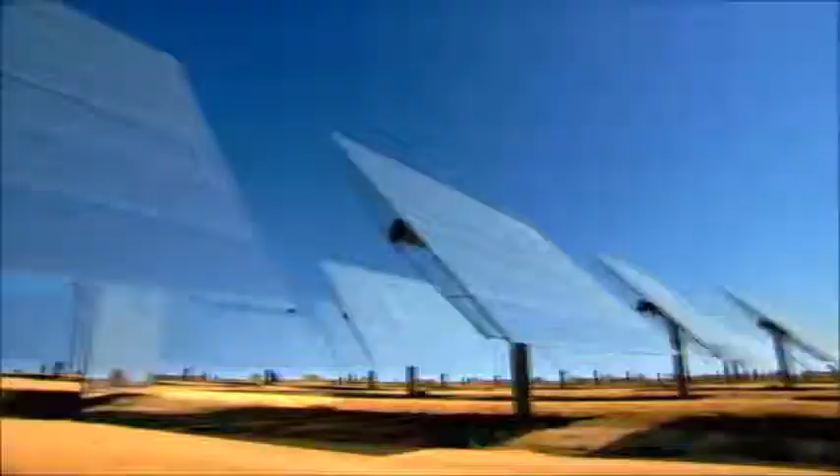When I was in college, I tried to think about, well, what are the areas that would most affect the future of humanity? So the three things were the internet, making life multiplanetary, and the third being sustainable energy. So that's what really ties together my companies, is that sort of thought from 20 years ago. Tesla Motors is Elon's sustainable energy brainchild. Named after electric power pioneer Nikola Tesla, it's a car company that only makes totally electric vehicles. No hybrid and no alternative fuels. Absolutely no tailpipe. The company estimates their electric cars cause 50% less CO2, even if much of the electricity comes from a coal-powered plant.

It's technology Elon and co-founder J.B. Straubel believe we need. We're solving problems for our children, our grandchildren. Oil is a finite resource, and eventually we have to find alternatives. When you take that oil out of the ground and you burn it, it's extremely dangerous. We should not play Russian roulette with the atmosphere. We only got one. Tesla's founders have a vision of a world without gasoline cars. They are convinced electric is not only cleaner, but better. Now, they want to prove it to the world.

They believe their cars can trigger a transport revolution and bring electric motoring to the masses. What we're doing here at Tesla can have an amazing impact and revolutionize the auto industry and make every car on the road electric. That's our end goal. The Model S is to lead their revolution. It's to be an electric car unlike any other. A family sedan that can go from 0 to 60 in under 6 seconds, and further on a single charge than any other electric production car.

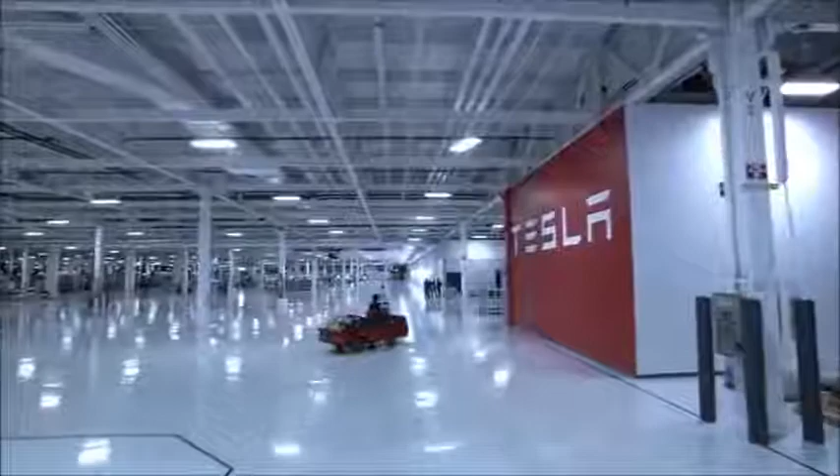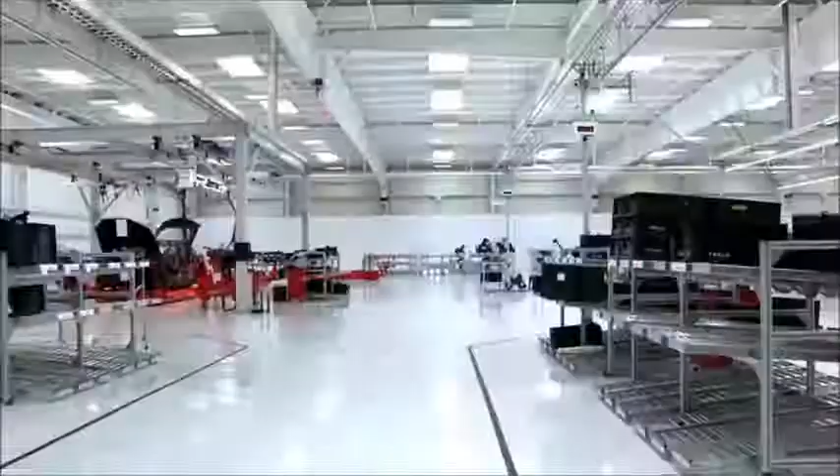It's a totally fresh approach to car manufacture. The walls and floors are painted white. The machinery a striking red. Skylights and windows flood the factory with sunlight. If you make the factory pristine and clean, that sets the tone for the vehicle. We want that same sense of quality and precision in the car itself.

As part of the whole company ethos, bikes are provided so the workers can get around the factory. I think it's important to have an environment where people look forward to coming to work. So it's worth putting some effort into making the factory beautiful.

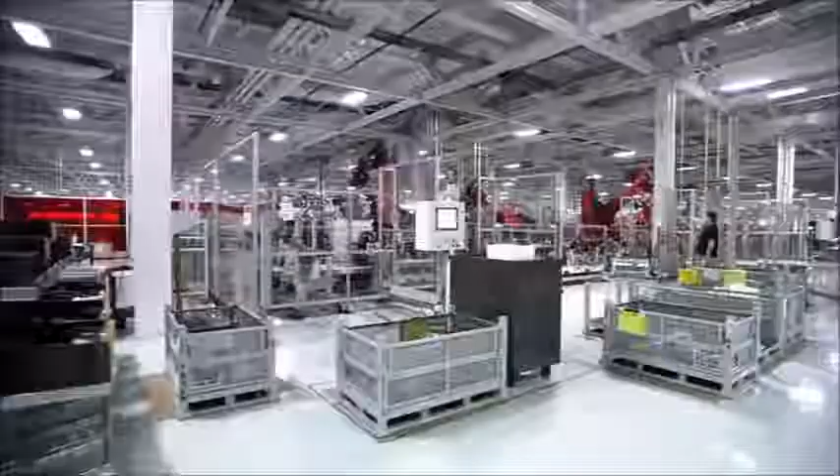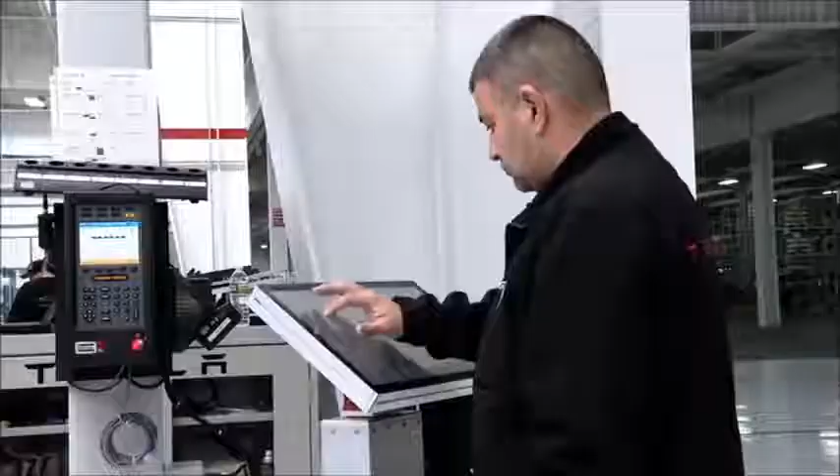In true Silicon Valley style, they fill the space with the most advanced technology, creating an automated production line capable of building tens of thousands of cars. Super efficient multitasking robots, self-guided smart carts, and computerized production schedulers.

The factory is designed to be up there with the very best in the world. We love engineering. We love beautiful machines. We love new technology. We love to innovate with high technology. And also in manufacturing, we love to do that.

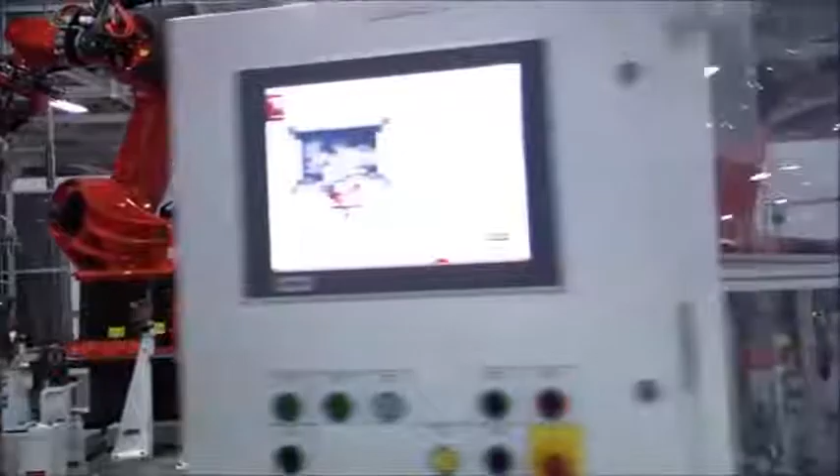Without training, these sophisticated robots are useless. They all need to be taught before they can run tasks automatically. Every robot is programmed by hand. The Tesla team has meticulously trained 130 sophisticated robots over a year and a half.

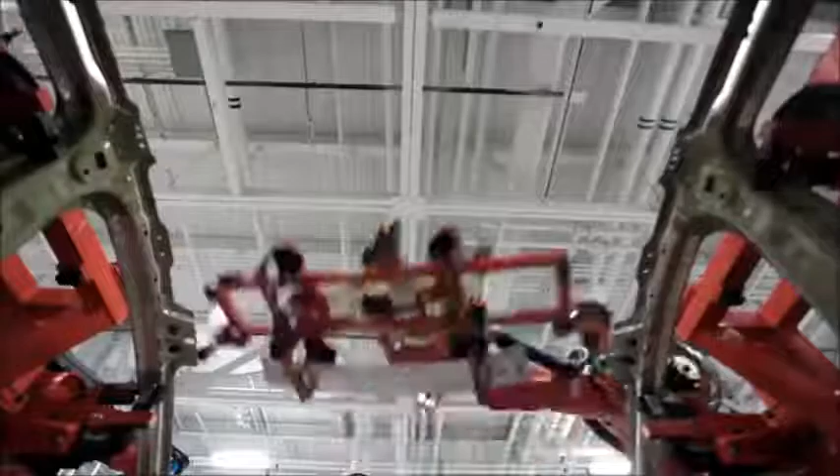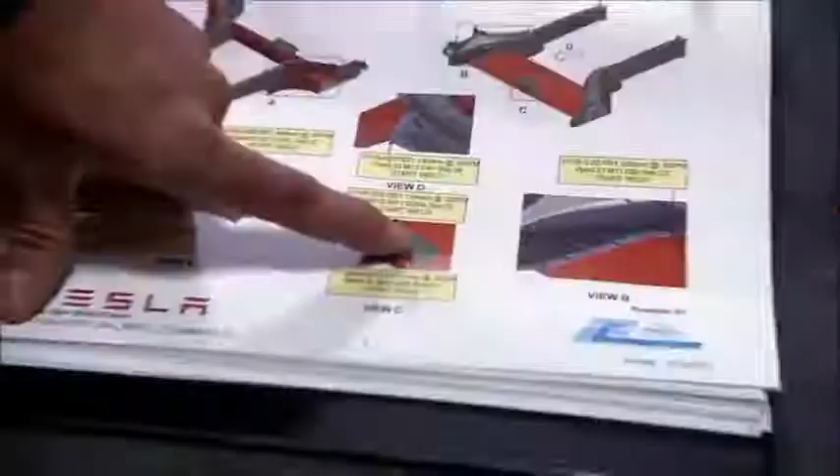One of the last robots still to be programmed is a multi-point welding robot. It will be used to join the car's underbody. These are pretty busy robots, so we got to make sure that our takt time is good. A robot's work is only as good as the man who trains it. Brad Johnson is a welder with over 25 years' experience at the highest level.

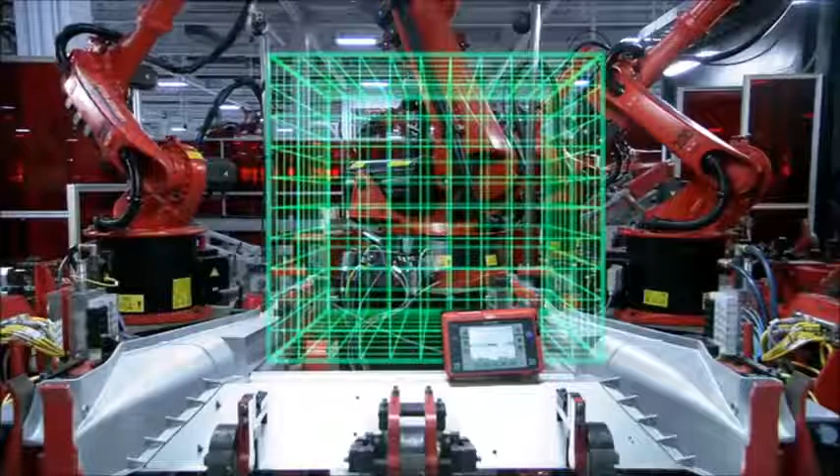Getting this done today, we'll have the teachings all nice and smooth, and then we can start running 100% and full automatic. That sounds good. The space in which the robot operates is treated as a three-dimensional grid. The head can be manually guided to any point using a teach pendant. There's our start point and our weld position.

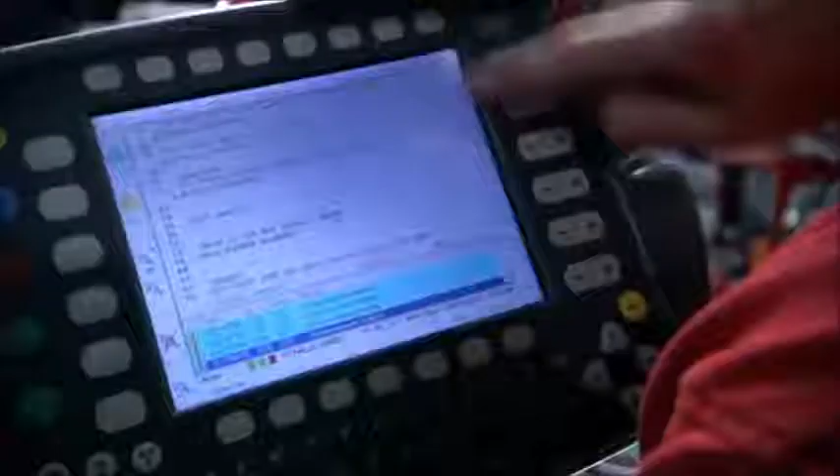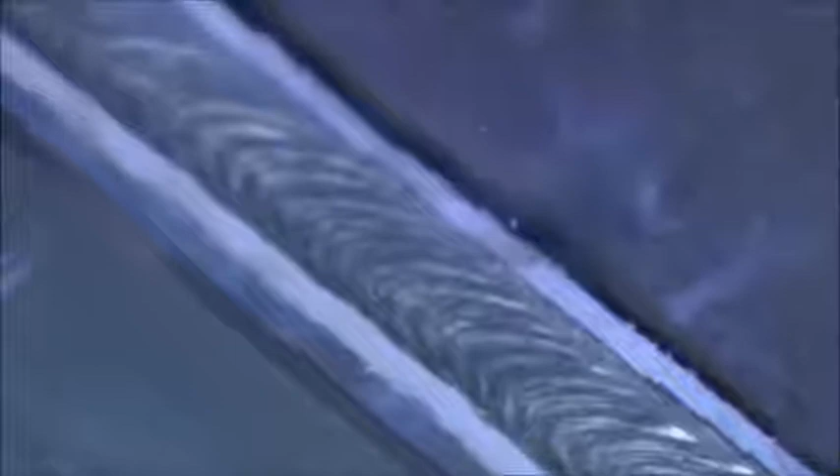Brad guides the robot millimeter by millimeter and uploads the coordinates. The robot works out the most efficient route and runs the program. Looks like the teaching is right on mark, and we have a really good quality weld right here. So we should be able to run full auto with this weld. When full production begins, Brad's handiwork will be exactly replicated by the robot 100 times a day.

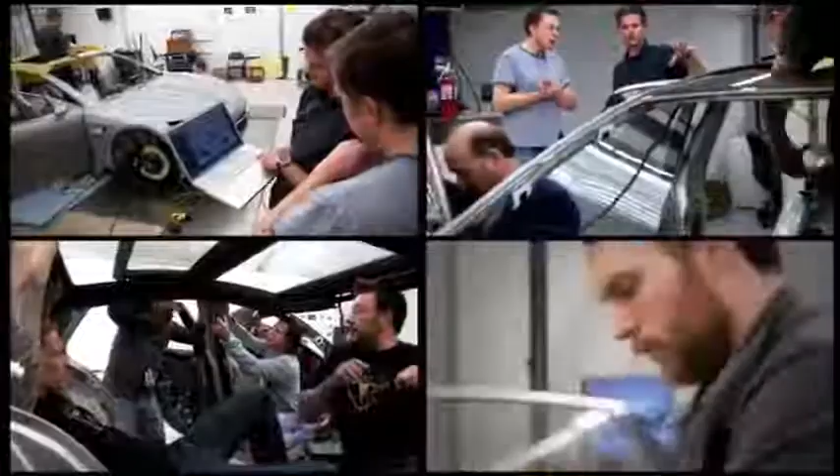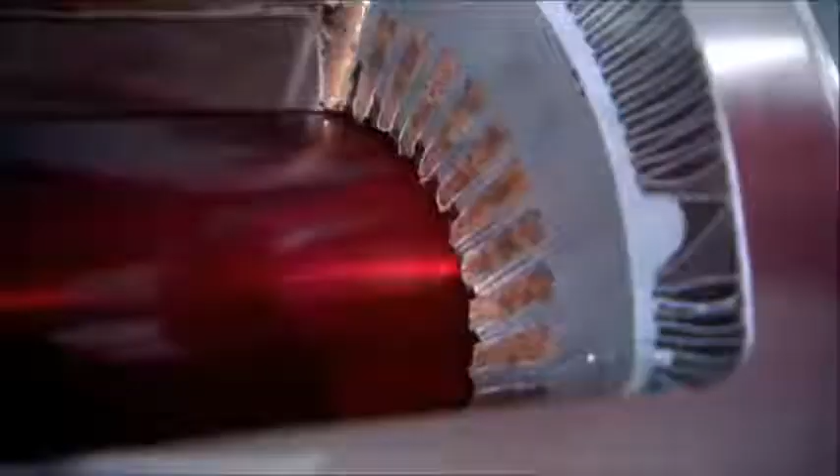Since their inception in 2003, Tesla Motors have been pursuing their electric car revolution with a step-by-step strategy. In an unconventional business move, Elon decreed that Tesla must invest in their reputation first and worry about profit later. Stage 1. Make a small number of high-value cars that prove electric power can be desirable. The Tesla master plan is very simple. We start off creating an expensive, low-volume car to help break the mold in electric vehicles.

Plan in place, they set to work on their first car, basing it around the British-built Lotus Elise. 5 years later, they released the Tesla Roadster. Quicker off the blocks than an Aston Martin Vantage, the electric sports car astonishes the motoring world. Step 1 complete in the Tesla strategy. What we showed was that an electric car could be sexy, it could be fast, and it could be long range. And that if you produce such a car, that people would buy it. But as a $100,000 two-seat sports car, it's a luxury second vehicle to most of its owners.

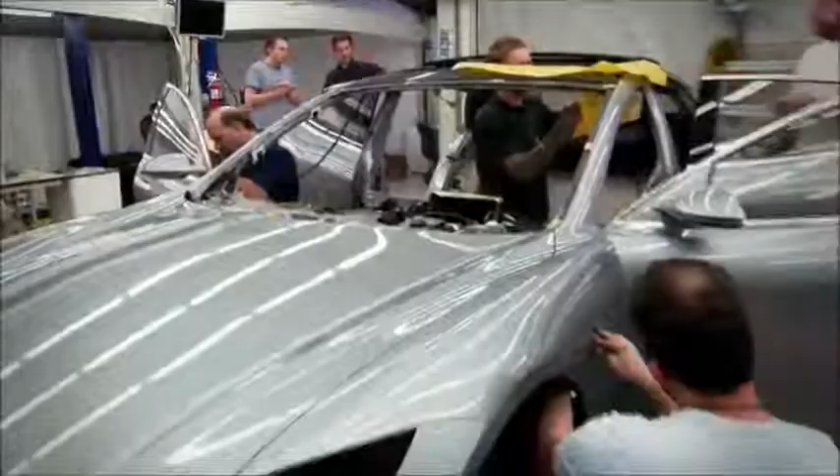Time for the pivotal Stage 2 in the master plan. A car that costs half as much and sells in much bigger numbers. A very important step in the Tesla strategy is really going to show that a mainstream electric car can be better than a gasoline car. The Model S is the second step in Elon Musk's vision of an electric revolution. A premium mass-market sedan designed and built from the ground up by Tesla.

At the studio in Los Angeles, they are working to craft that car. The Model S is really the foundation of Tesla. It's the first true product designed, engineered, built, manufactured by Tesla. And it's really the beginning of what our mission is about.

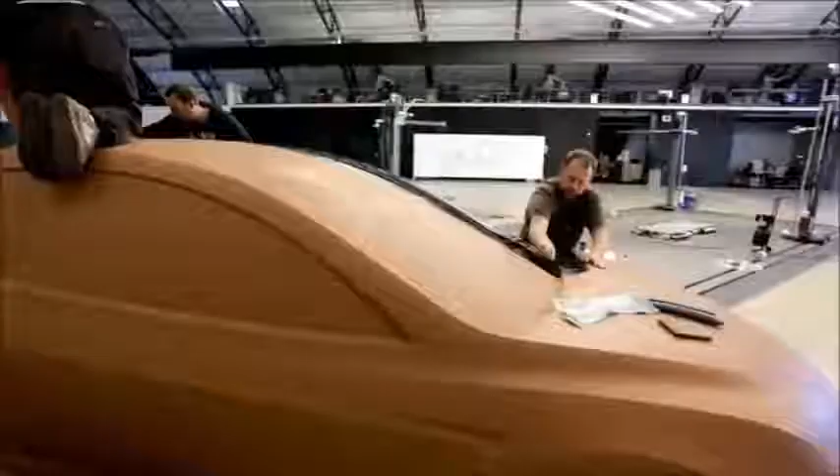Franz von Holzhausen is the chief designer. He believes Tesla's design needs to have some conventional appeal. It's really easy to have a clean slate and go pretty crazy with that. We had to start with something that people could relate to. If they even knew or cared that it was an electric vehicle, they were attracted to it.

We've stretched the sedan and made it a little bit more modern, but it's still a sedan. It still has this somewhat traditional cue, and so it's easy to love because of that association. Although uniform in appearance, the Model S is a unique car. It was conceived as electric. Even the shape is designed to maximize the battery's range.

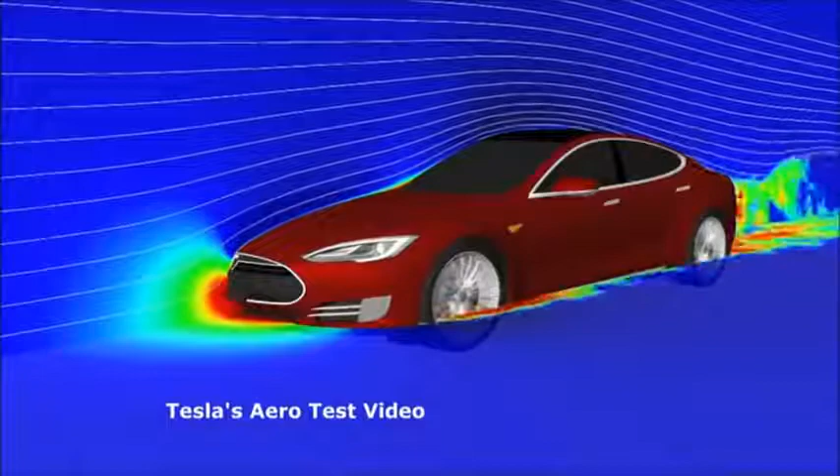And the body and the waist here is all slim, so there's no excess fat or body mass on this car. And that's another one of those elements that just translates into great efficiency. This car is one of the most aerodynamic sedans on the market. In an electric car, conserving the battery power is so important, the designers put huge efforts into reducing the drag. Even the door handles are aerodynamic, receding flush into the body.

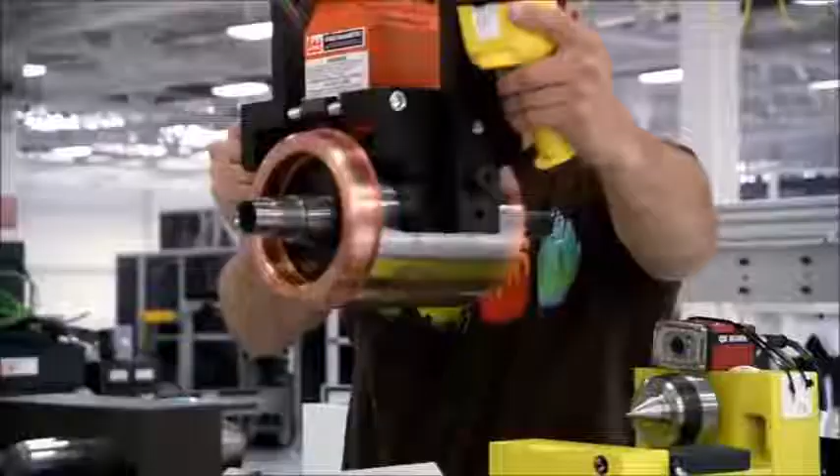But it's the interior that is most heavily influenced by the electric powertrain. The powertrain is incredibly small. You get the same performance out of a motor that's the size of a watermelon that fits between the rear wheels, and everything else above that is what I call the opportunity space.

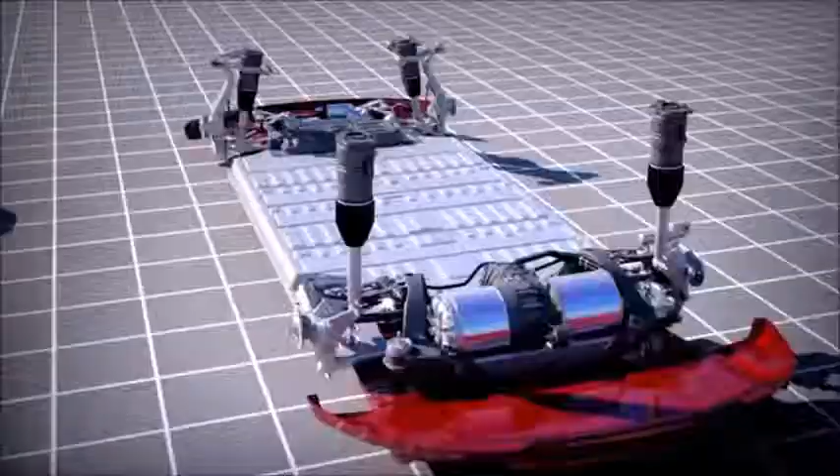The design team started with the motor and flat battery pack and worked upwards. With the motor next to the wheels, there's no need for a drive shaft, so there is no rise under the rear middle seat. There is no fuel tank or transmission. The Model S has free space from the floor upwards.

What you'll see is a vast amount of space. In fact, it's actually so big that we decided that we could actually fit 7 people, and we do that by putting 2 rear-facing child seats in the back here. And you can see where they fit here, and their legs go right down in there.

So this is what we call the frunk, and it's really the trunk in the front of the car. And arguably, you can put a whole bunch of stuff in here, even when the back of the car is totally loaded up with people and kids and stuff. And who doesn't need one of these?

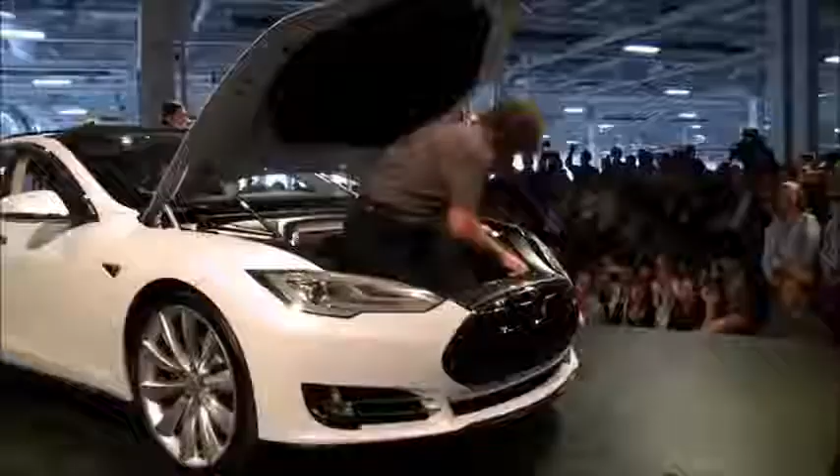Tesla promote these unique features at every opportunity. As a new marque, they're trying to make an impact in a marketplace crowded with established big hitters. Just looking at the United States, of the 3 other car companies, the youngest is 90 years old. So clearly this is not an industry that has been supportive of newcomers.

The Geneva Motor Show 2012. Another leg in the company's relentless promotional campaign. We're done selling Roadsters in North America, so this is our product. It's our product, Tesla product, and therefore we need to get it out to start selling.

Industry experts are judging Tesla on the Model S. It's seen as make or break. Maybe Tesla has a bright future. I think the Model S is very decisive to see if there will be a great future or if there won't be a future at all.

The company have taken the risk of collecting prepaid orders on the car. They've amassed nearly 10,000 advance sales. The financial boost also creates real pressure. I get harassed quite a bit actually by some people who have reservations, and it's a lot of expectations, very high expectations that we're going to have to meet and exceed, really. Some prepaid customers have been waiting up to 3 years for their car.

In return, they've been promised a delivery deadline. I do feel an incredibly strong obligation to those that have placed their faith in Tesla and put down deposits. I'll do anything to make sure that their faith is not misplaced. The delivery deadline for the first cars is now only 2 months away. But the brand new factory hasn't built a production car yet.

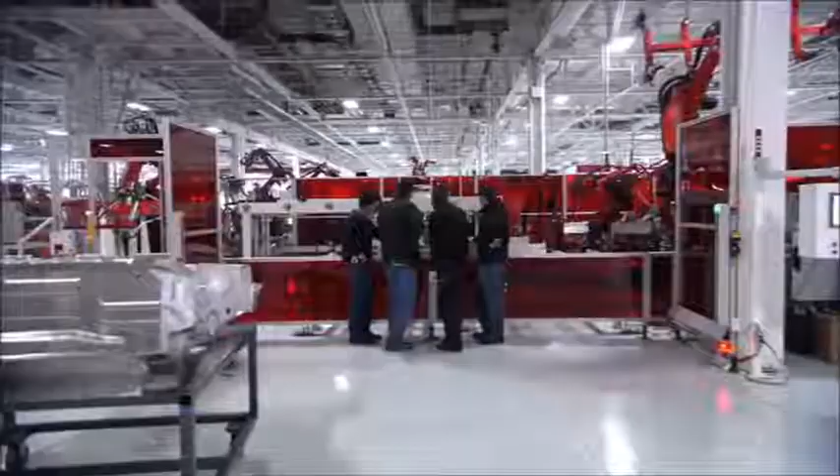Tesla need to build 20,000 cars a year. But before mass production can begin, Gilbert and his team must prove the factory is ready. The company is relying on them to get it right. We have to make sure that car after car, the quality is there, everything is perfect along the way. So we are really gearing up towards a production ramp-up.

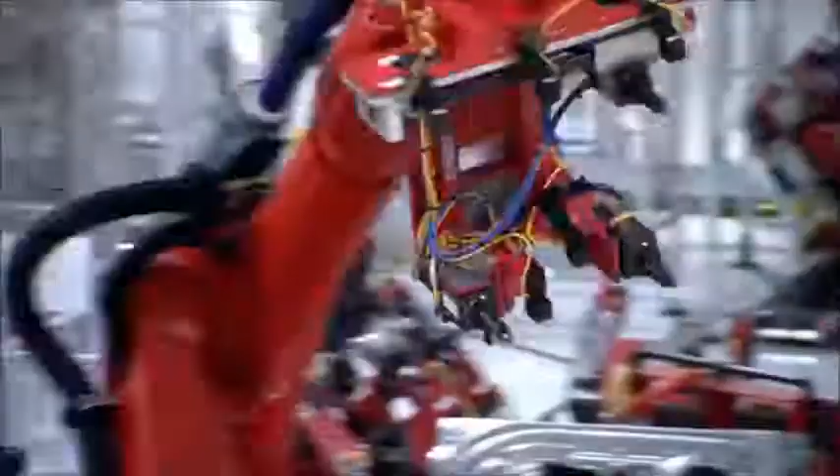Over the next few weeks, the factory will test manufacture a limited number of Model S. If the line doesn't perform with these cars, the company will be forced to miss their deadline. Tesla's electric revolution would be over before it started. A very, very important moment is the birth of Model S in our Tesla factory. And it's where the rubber is going to meet the road, so to speak.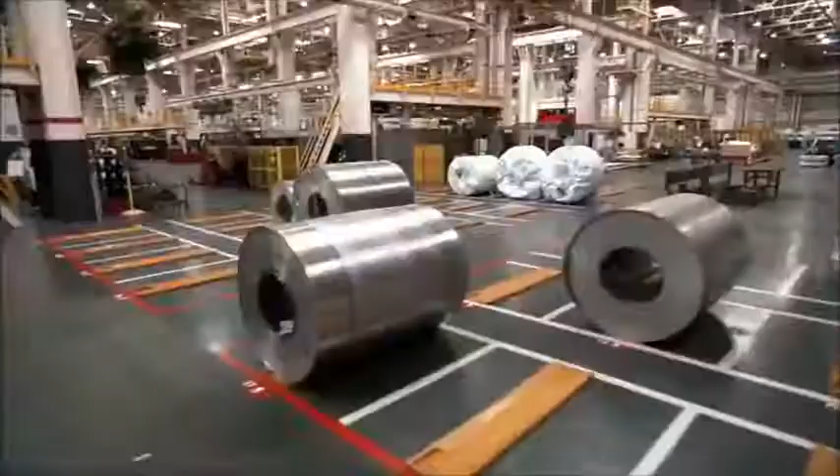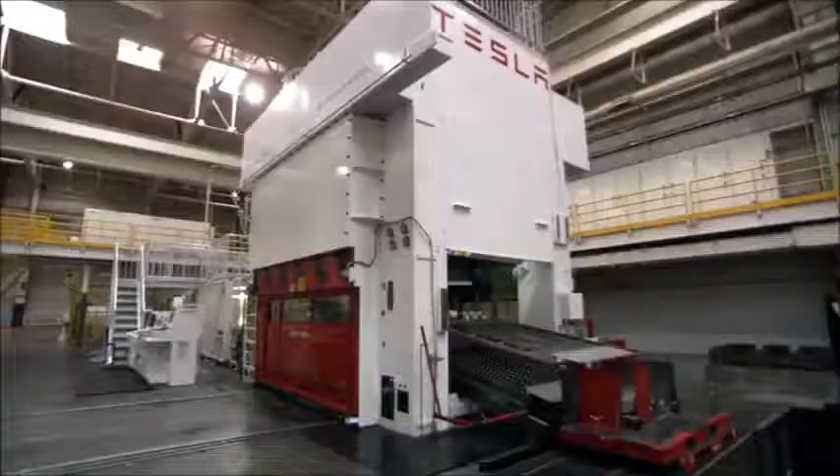The process begins in stamping. To increase the battery's range, the company have decided to build 97% of the Model S with lightweight aluminium. It's an extremely rare feature in a mass production car due to the cost. Every Model S starts as one of these. The roll is loaded into the mechanical cutting machine. Once cut, the panels are passed to the stamping press.

We need to translate flat pieces of aluminum into 3D forms. And how to do this with aluminum stamping with the level of quality that we expect is really, really challenging. To meet the challenge, they buy the largest available stamping press in North America. It's one of the first pieces of equipment they install. Over 3 stories high, it has to be transported from Detroit on 70 trains and then entirely rebuilt.

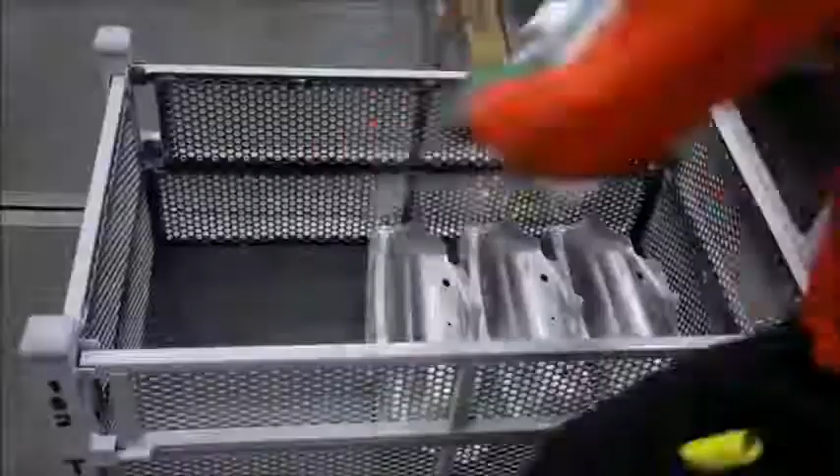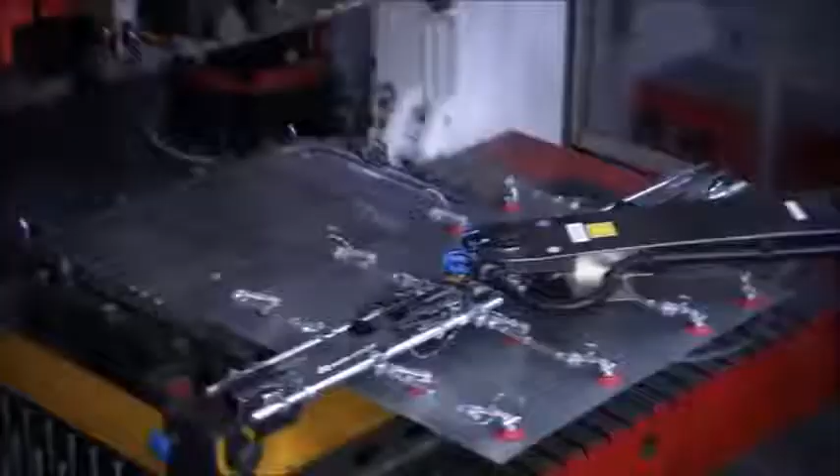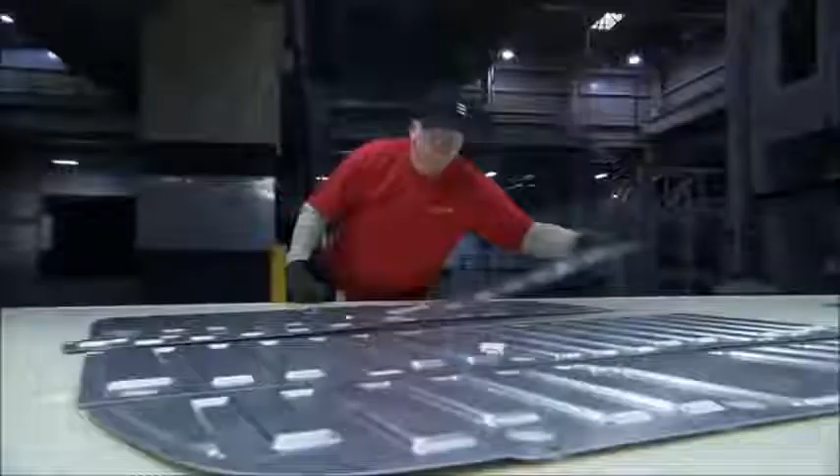The immense pressure from the stamp allows them to press the complex body shapes needed for the Model S. It can be mounted with different heads, known as dies, that mold the panels into a wide variety of shapes. Robotic arms feed the 4 stamps. Each stage forces a more detailed 3D shape, producing stacks of floor plates. These lightweight aluminium parts improve the Model S's power-to-weight ratio, which helps increase the performance and range.

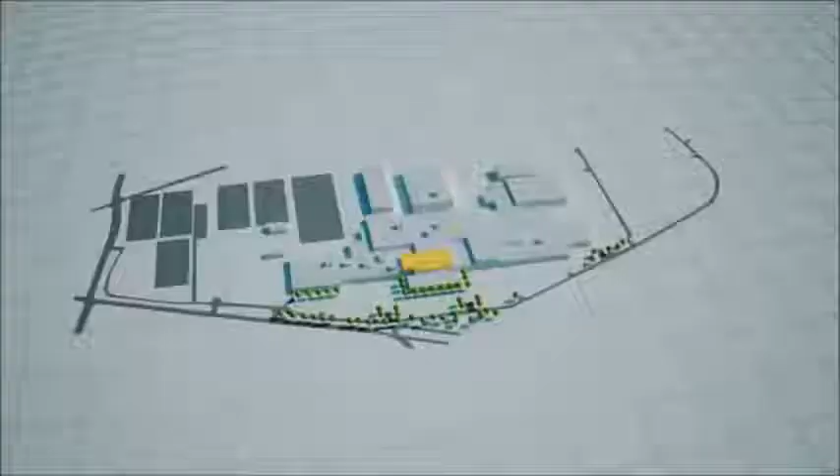The 2 things that obsess co-founder and technical chief J.B. Straubel. Any ideas on how we can make it better? Performance and range were the 2 big issues that needed to be improved, and that's where we've put most of our focus on the technology and powertrain. Powertrain manufacture, 2nd floor. This is where they build the heart of the Model S, the motors and battery packs. Tesla know the electric powertrain will define their cars, so they push to advance the technology themselves. This is an extremely exciting field where inventions continue to happen even faster than they did in the years previous.

Tesla's solution to improving battery life appears startlingly simple. They use thousands of small lithium-ion cells, similar to laptop batteries. Thanks to these regular batteries, the company say the Model S has achieved a top range of 480 kilometers. Once you have 250 to 300 miles of range, then you're in a different usage mode. You're in a range that is equivalent to most gasoline cars. The car can be charged by 100 kilometers every hour from a regular power outlet.

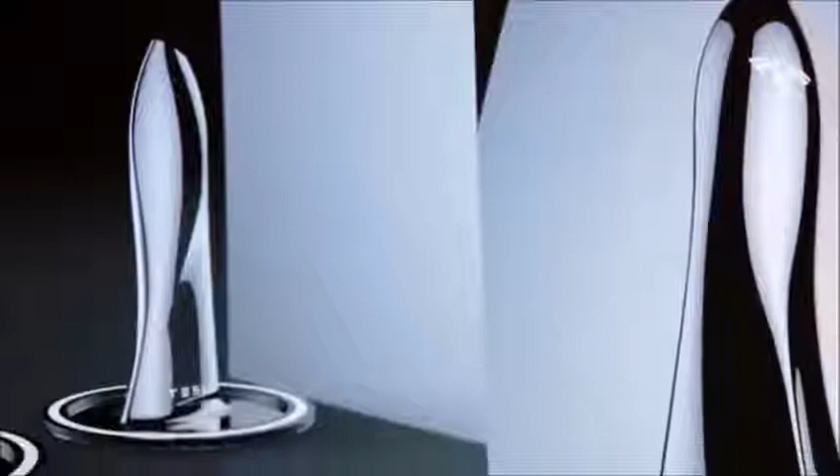Ultimately, Tesla are hoping to install superchargers along major highways that can charge the car to capacity in 45 minutes. You can charge the car up every night, but you don't need to. You can actually charge it once a week. The high-performance battery pack is formed with over 7,000 small cells. They're organized into a flat layer with specific groupings of positive and negative. The final layout is the key to the pack's power and range, and Tesla considers it absolutely top secret.

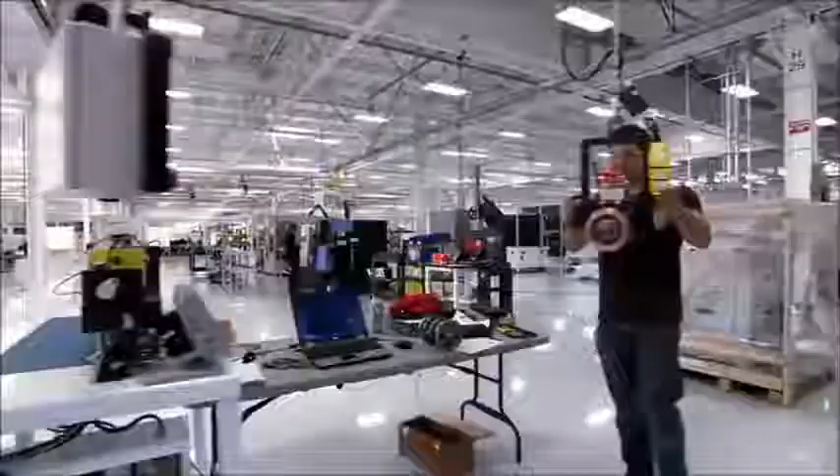The motor unit is also developed in-house. It's essentially an AC induction motor, a concept invented by 19th century scientist and Tesla Motors namesake, Nikola Tesla. He harnessed an electromagnetic field to turn a basic motor. Modern-day Tesla has developed their motor with a highly conductive copper cylinder. When the electromagnetic casing is fed with current, the copper cylinder inside starts to spin. It's nearly 3 times more efficient than a combustion engine. In fact, there are only 3 moving parts. It connects directly to the rear wheels and doesn't need a transmission.

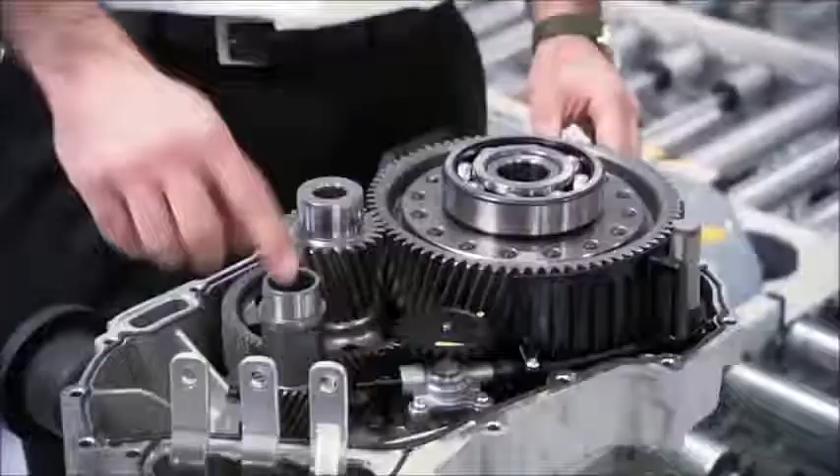These are the 3 moving parts in the whole Model S powertrain. One of the cool things also with this very simple gearbox is that when we want to go in reverse in the car and back up, all we have to do is spin the motor in the other direction, and the car backs up. We don't need a clutch, we don't need a separate gear for reverse. The entire drive unit is under 1 meter long, smaller than a golf bag. But it propels the Model S, a family-sized sedan, into the class of performance cars.

In fact, this powertrain creates a totally different driving experience. Program Director Jerome Guillen works constantly to refine it. As with the light switch, electric power can be fully applied instantly. The first thing that's going to surprise people is how much torque you get so quickly. That response, instant response, you cannot really mess with the throttle too much, because if you push on it, then the car will go.

Even from a stop, you have a very quick takeoff, because basically the torque is instant. So if I stop here and then I start, you will see that we have an acceleration right from the beginning. Any speed, you have that same torque available. So it's very easy to pass a car or to get out of harm's way if needed. Unlike gasoline cars, which have to change gears, the Model S can accelerate to top speed totally uninterrupted.

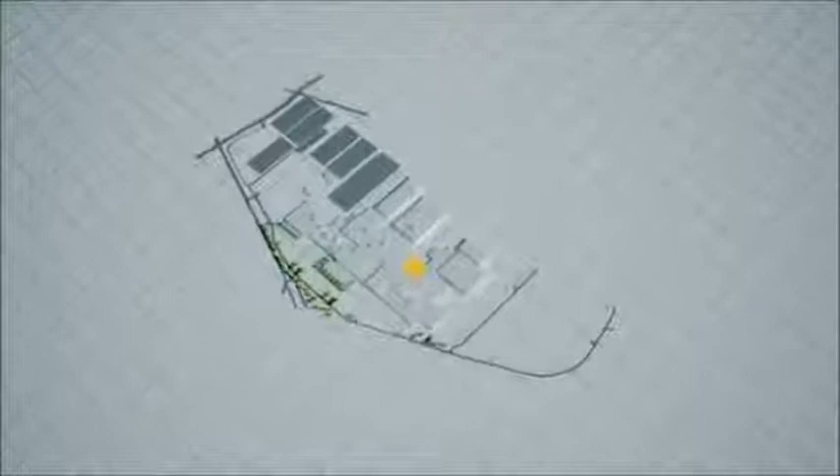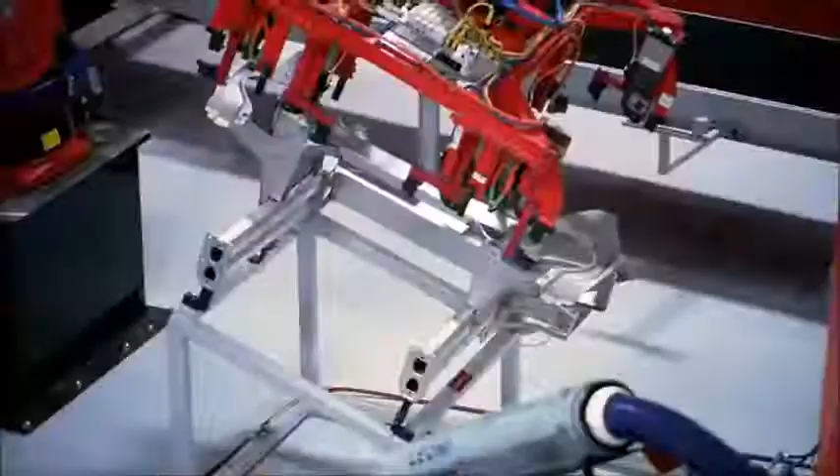In the factory, the delivery deadline is now fast approaching. The Model S test production cycle reaches the main assembly area. The car is based around a all-aluminum underbody. To make it, engineers weld struts and casts into a framework. Brad's newly trained welding robot is about to be tested in full automation. They have trained the robots with prototype parts. Now, with final components coming through successfully from stamping, it's automated production for real.

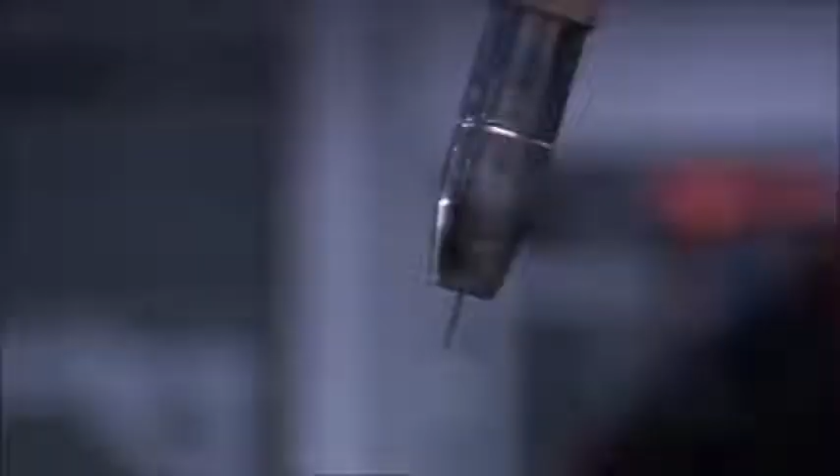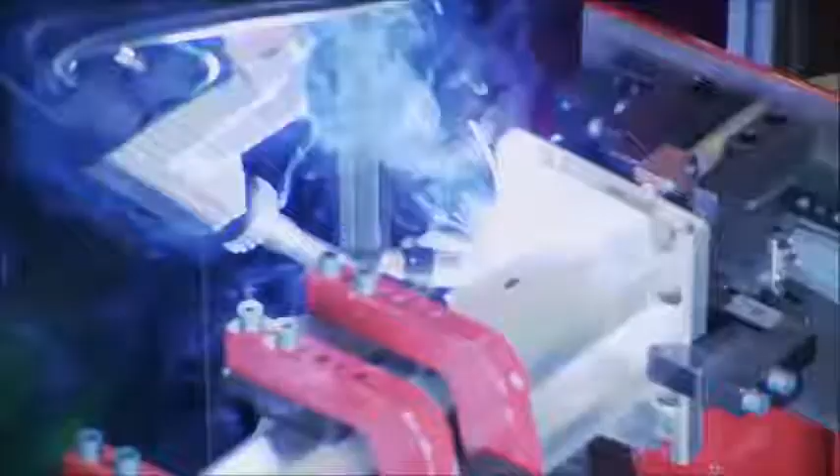Under observation, it's a tense time for the team. The robots work in a tightly coordinated chain. The second phase hits an issue. It shuts the whole process down.

With the deadline looming, Elon Musk is determined to keep Tesla's waiting customers happy. He's organized a Model S test drive event for the people who've placed deposits. The test rides will go out onto Jack Northrop Boulevard, so you'll get a chance to see that this isn't some show car that doesn't actually do what it says. It will go fast and with a lot of people in it. And quietly, yeah.

Many have prepaid years ago, and it's their first time inside a drivable Model S. Customer and board member Steve Jurvetson captures his experience on his mobile phone. Wow, this is insanely cool. It's a surreal scene. It's way cooler than I can imagine. You really decked this out. Yeah, it's nice. The first ride has to be documented here. The event seems a success. Now the company need to make sure the customers get their Model S's as promised.

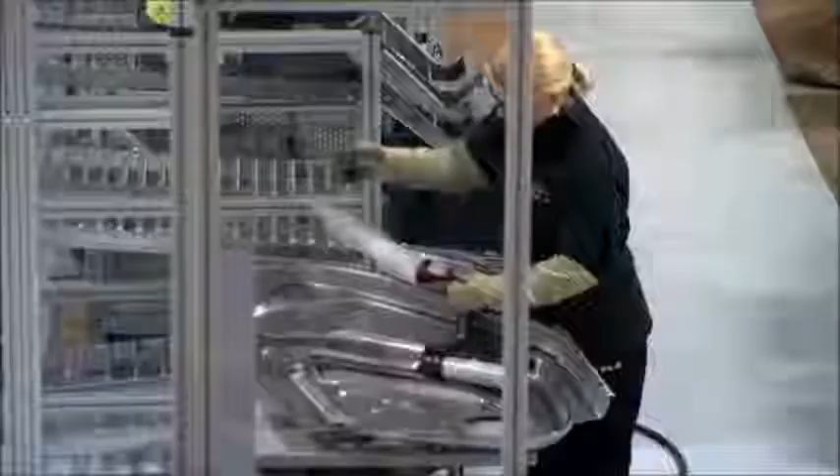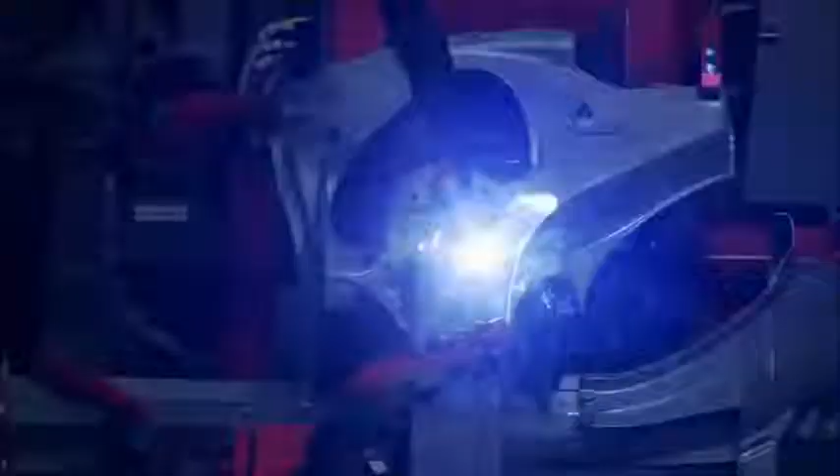With only weeks to go, welding has hit a glitch in automation. One of the robotic clamps is millimeters out of line. It's a tiny difference, but enough to disrupt the process. With the way the robots work and how we have such a tight tolerance of 1 millimeter to stay on, sometimes the new parts won't reach across or the clamp won't close all the way. A major delay will disrupt the whole production schedule and threaten the deadline. They adjust the settings and set the robots in motion again. This time, it goes off without a hitch.

To the team's relief, the process can be approved for mass production. The run through the automated line reaches the Model S exterior. The Model S body is made up of 14 different sections. To speed the workflow, Tesla construct each section at separate sub-assemblies.

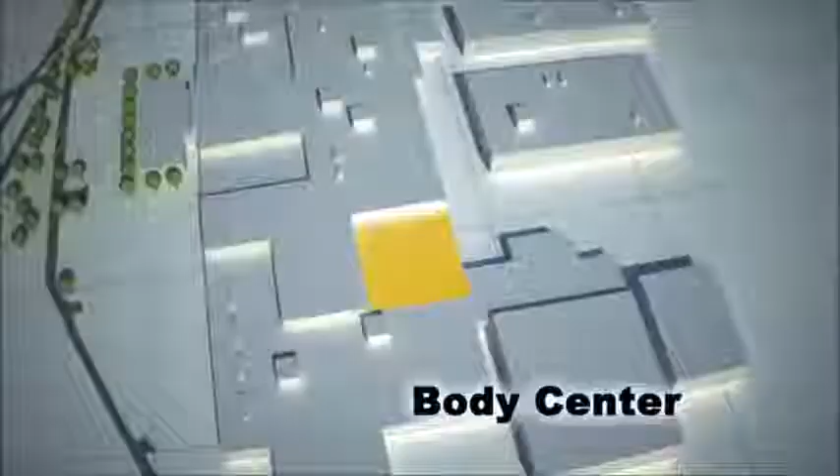Door sub-assembly. The internal frame is joined to the exterior panel. As the robot's pincers come together, they fire a rivet and join the aluminium sheets. Over to the right, side body sub-assembly.

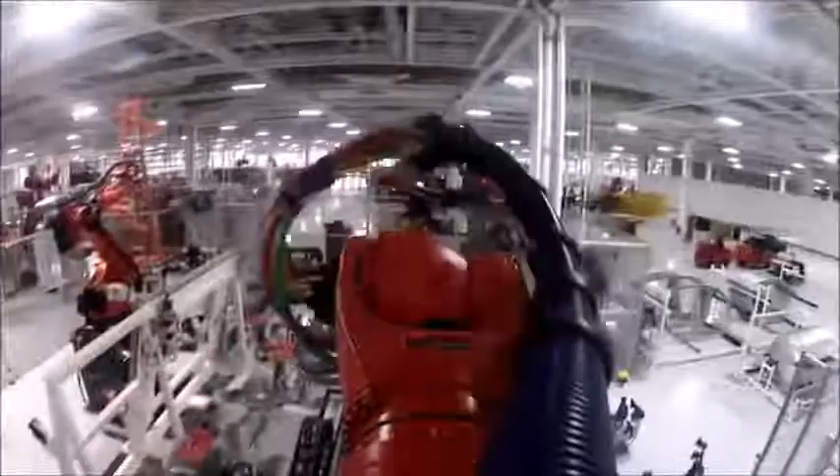One of the most advanced aspects of Tesla's robots is that each arm can perform a variety of different tasks. We have to use all the gamut of technology to make the aluminum joint between stamping and welding and riveting and bonding and all these things using robots that are multitasking. This flexibility is essential for a compact and efficient workflow.

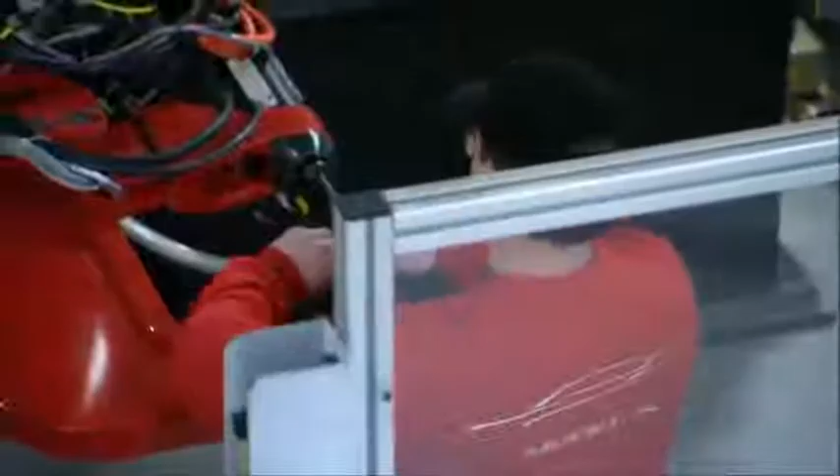A robot can spot weld using a pincer tool and then automatically detach the pincer and pick up a clamp tool. The same arm that joined the panels can now move it to the next station. It's clever, but tricky and needs constant refining. When you draw something yourself, you take a pencil, you take an eraser with the same hand, right? And then you change the tool, so to speak. Same thing here.

Once assembled, the sections are brought together at body assembly. Here, they're riveted around the welded underbody to form the basic shell of the car. All the sections are lined up alongside the central framing line. Gradually, the automated line builds up the side sections, ready to house the doors.

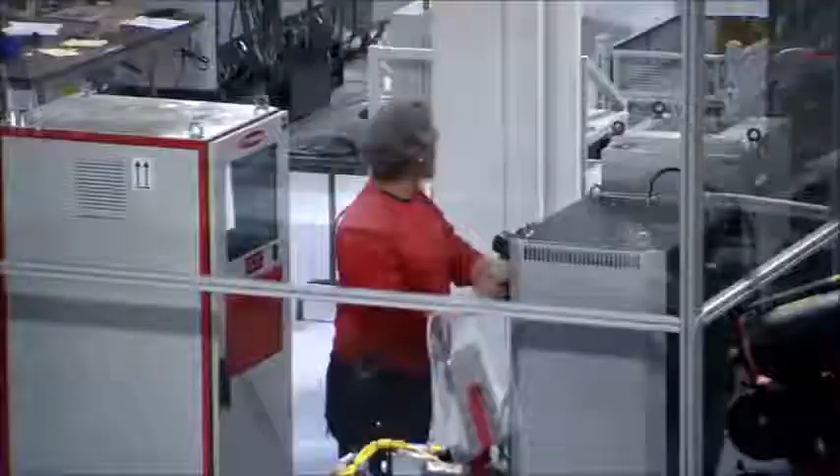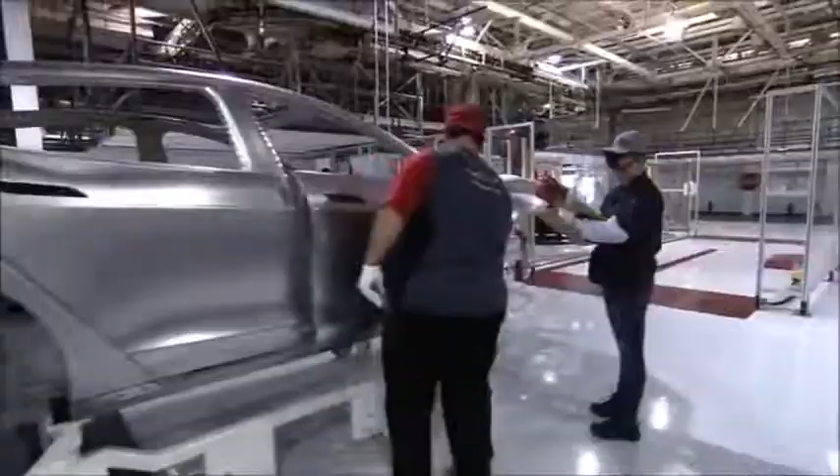A test batch of 3 cars is complete. Body assembly has demonstrated it can run successfully in full automation. It's a vital milestone in the countdown to mass production. Completely assembled, the aluminium body is now known as body in white. It's ready for some color. The body in white is loaded onto an overhead train that carries it to the paint area.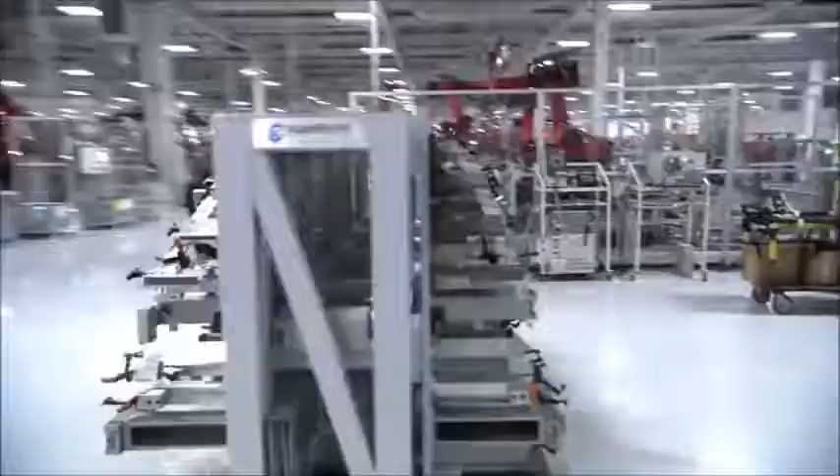At this vast facility, the paint center is in a totally separate building. The Fremont site covers nearly 95 football fields of space. It's so big, the Model S production line only fills 20% of it. For Gilbert Passin, the extra space is the cornerstone of Tesla's grand strategy for an electric revolution.

The Tesla factory is huge. It's about 5 million square feet on 2 levels. Right now, we are only utilizing a small fraction of the space, but most of it, as you can see behind me, is what we call the dark side. It's sort of dark and not utilized yet, even though we have a lot of plans for the future on how to fully utilize this entire building.

These expanses are an integral part of the company's stage-by-stage building plan. They want to fill the space with a production line for a further range of Tesla vehicles. A very high-volume, economy-priced model, the Stage 3 car. In the future, we intend to expand our range of vehicles, maybe of a smaller size and also more affordable for the market. And this factory is ideal, and we are going to make this a super mega factory.

Long term, Fremont is meant to produce the low-cost Stage 3 electric car in the millions. It's the final step in Elon Musk's Tesla master plan. To really have widespread adoption of electric cars, we have our 3rd generation vehicle, which would be a low-price, high-volume vehicle, and that's really what's going to fill out the rest of this humongous factory. I'd love to bring this to 500,000 vehicles a year as soon as we can. The future of Elon's strategy first depends on the success of the Model S.

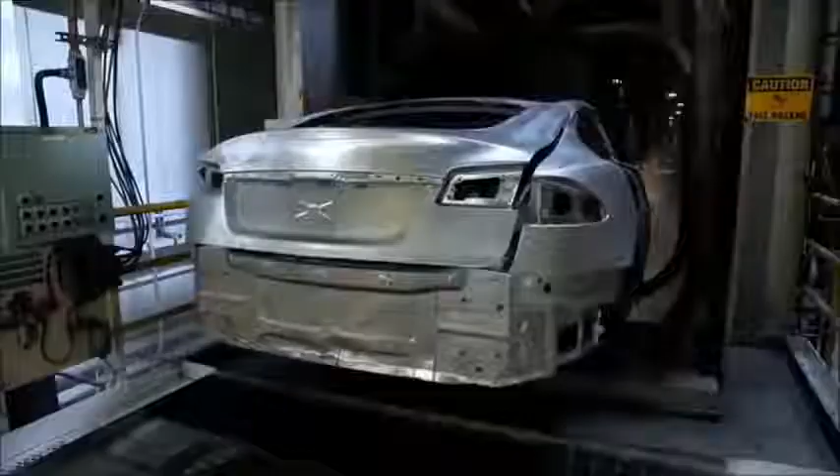First, a roller coaster ride of treatment baths. Detergent to clean the surface, and then electrocoating. The electrocoat helps attract the paint to the aluminium. The primed car is ready for colour.

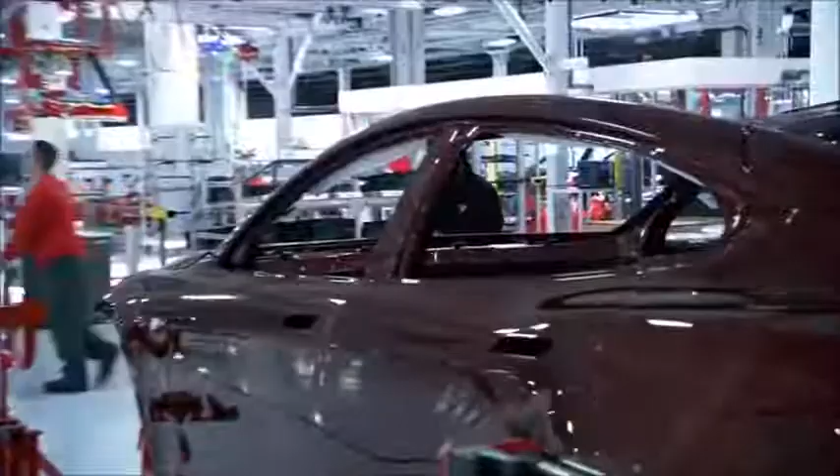This vehicle will be sprayed with their trademark tint, what Tesla calls Signature Red. It's a color that we developed that's different than anybody else's red. It's been developed with glass flake to get the specific type of sparkle that we want to get in that paint. The Model S spends over a day and a half in paint. And that attention to detail carries through to general assembly.

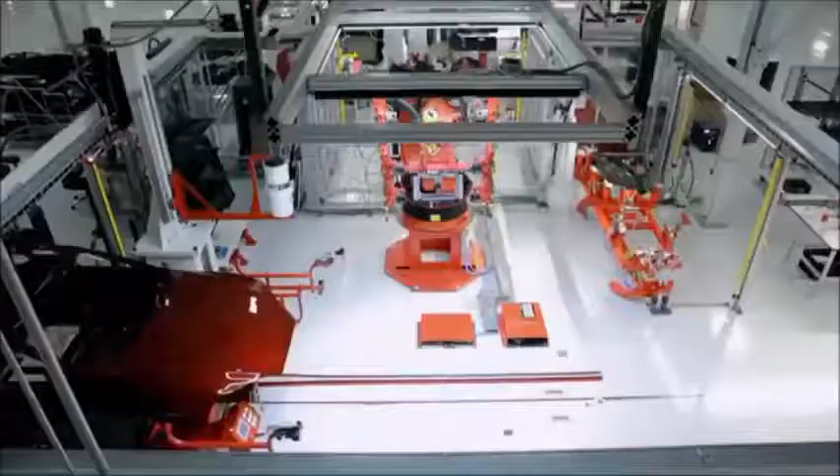First, the Model S's panoramic glass roof. The installation robot takes a picture of the top of the car. It uses the digital picture to measure the exact orientation and bond the glass.

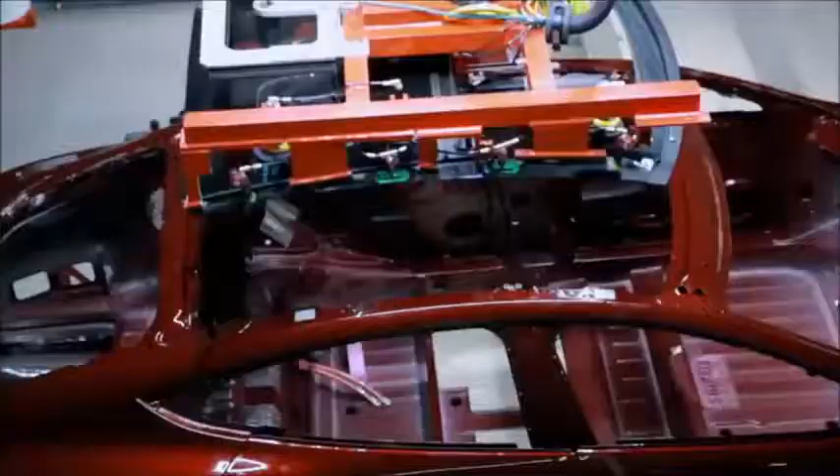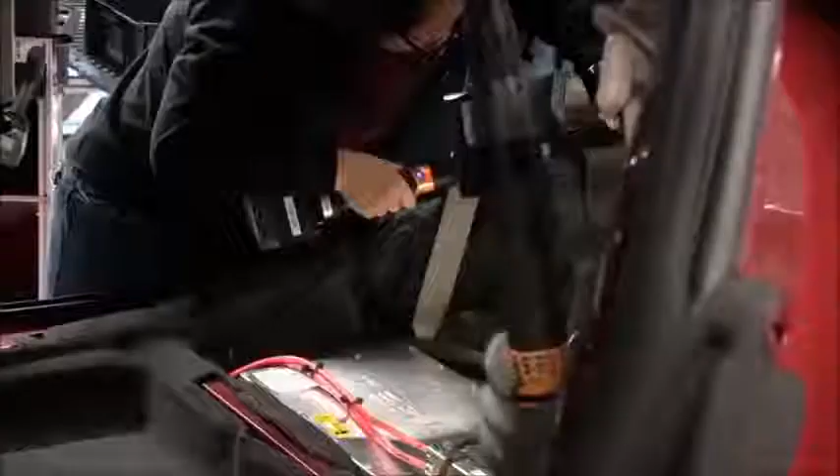Next, the interior. The wiring and seats are fitted. The aerodynamic door handles are installed. To get the delicate installation right, a wireless system adjusts the torque for each bolt. The cutting-edge dashboard is lowered into the car. It's proof the car is a product of the tech-savvy US West Coast.

The Model S carries a touchscreen tablet inspired by Tesla's Silicon Valley neighbors. Tesla is very much a Silicon Valley company that has a Silicon Valley operating system, which is similar to a Google or a Facebook or an Apple, joined together with a tremendous amount of great automotive expertise. It's about bringing the things that we're used to, our phones, our computers, and the interaction that we have with them into the car.

The car has a mobile 3G internet connection. The driver can download software upgrades and customize the display. The car's always connected to the internet, so we can understand your daybook, and we can know that you're going to work at 8 a.m. on Monday, and the car can be warmed up for that experience.

The entire command center is housed on the 17-inch tablet. The interior is virtually buttonless. It does some really amazing things. Not only does it make the rest of the interior super clean and really uncluttered, it allows you to have just amazing control of the car, and it's just a push of a button. Like magic.

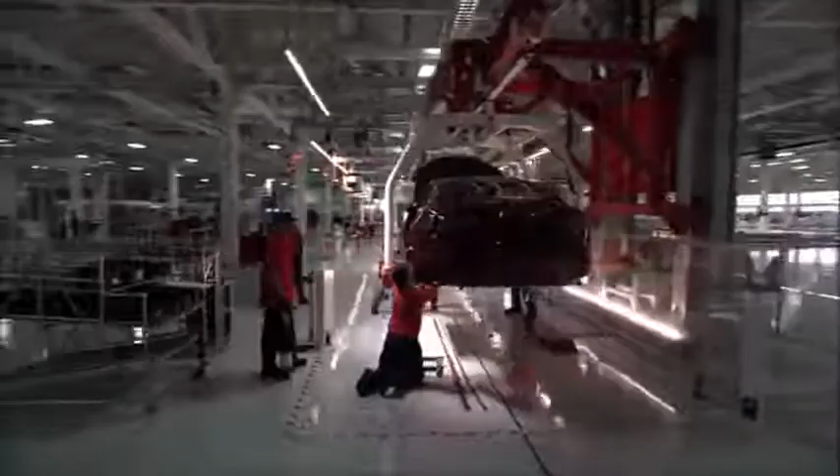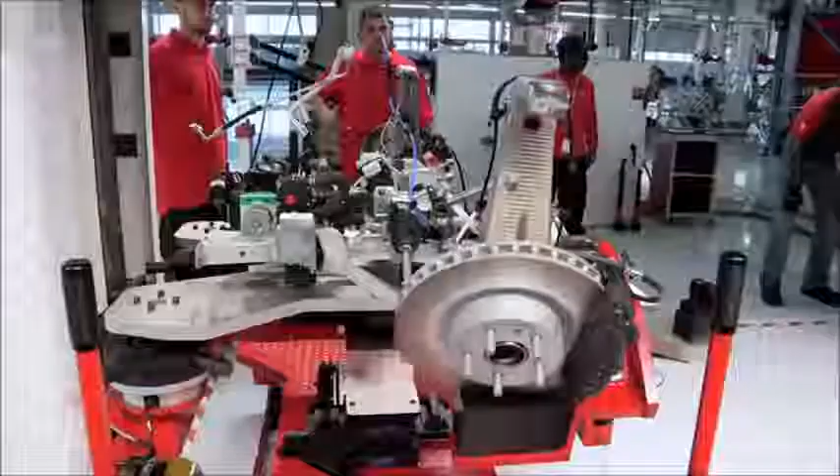At the factory, the start date for mass production is now only 2 weeks away. The first batch of test vehicles reaches the vital final stages: powertrain and body marriage. In gasoline cars, installing the drivetrain is a lengthy process. With electric, it can happen in just 2 steps. Step 1. The motor unit, complete with suspension and brakes, is bolted into the rear wheel berths. There is no drive shaft or transmission to be attached. In one motion, it's fitted.

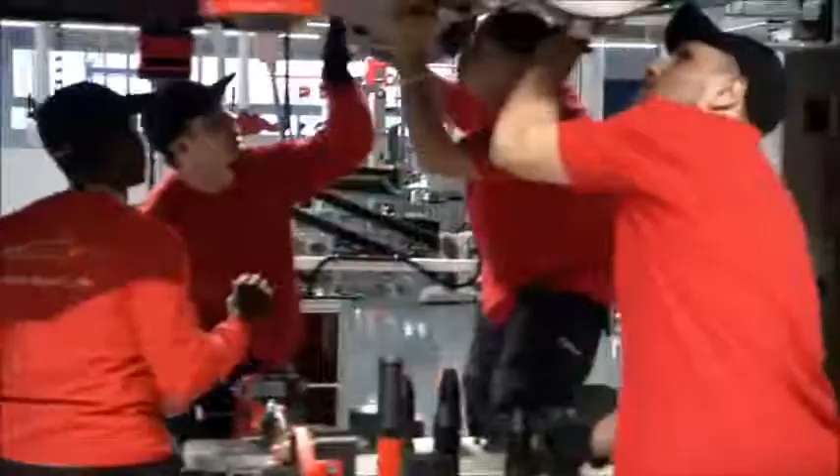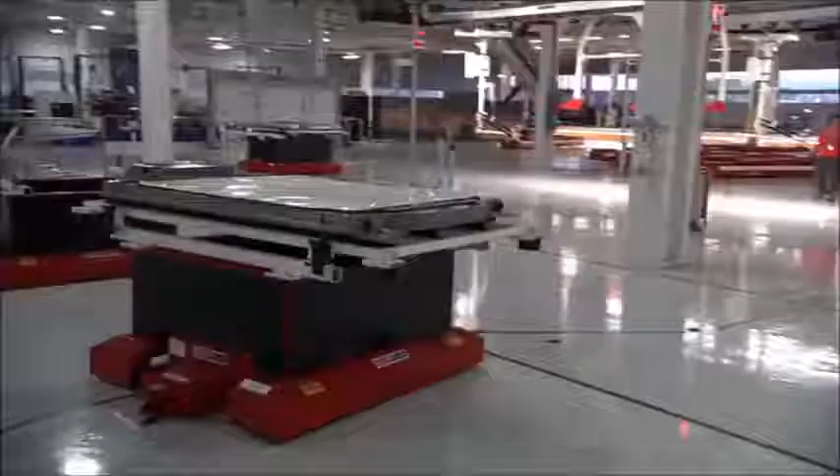Throughout the build, every single time you may hear me in the background saying, we're at 2 minutes, we're at 5 minutes, right? So they can know exactly where they are when we're shooting to get to that 4 minutes and 42 seconds. Step 2. Battery pack installation. The pack's steel case acts as the car's chassis. Bolted into place, it gives the Model S its rigidity.

A stage along, the first complete cars arrive at final inspection. At Elon's insistence, inspection happens on a bamboo platform. He believes you can only judge a car's beauty if it's framed by beautiful surroundings. The last check is the test drive. At Tesla, the track is very different. Because electric cars produce no exhaust fumes, they can be driven indoors.

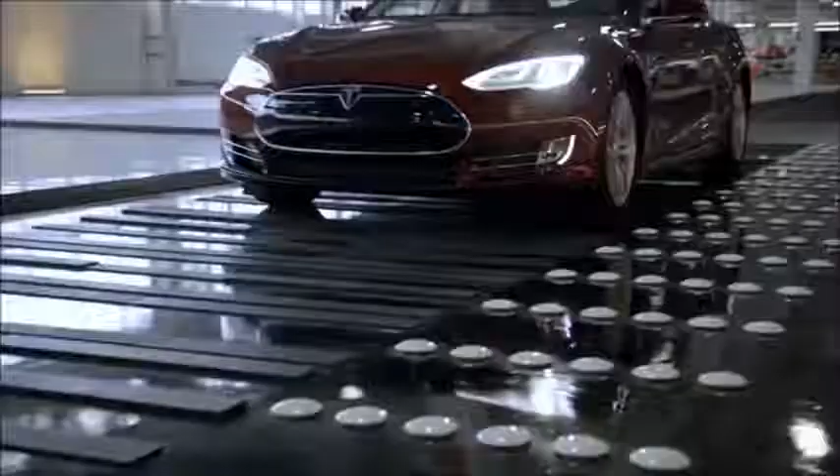Our people have done so well at putting this car together. You can see the remarkable quality of the paint and the entire vehicle, the body fit and everything. I'm so proud today. This is the first Model S to pass through the production test run. And its quality proves the new megafactory is ready for mass production. It's a big moment for the company.

Just to see this car going around the test track here, it really demonstrates the fact that the Tesla factory is ready to go. I just have to make 20,000 per year more of this kind, and it's sort of a done deal. We just have to get it done. The factory can now push towards the delivery deadline.